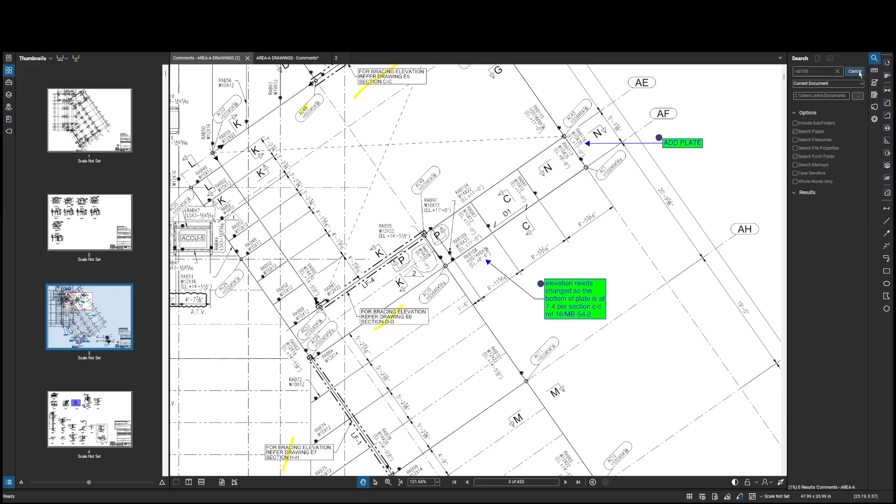So I'm going to get in here and show you a little bit of what was going on. I'll start with this RAB 108 here. We go to that detail... oh, that's not it. You'll see this little plate here.

This plate is supporting a doorway currently. As you can see in this view, it's supporting this brick above the doorway, but there's no plate to support this brick over here. I'm kind of puzzled by it, why you would only support this portion but not this portion.

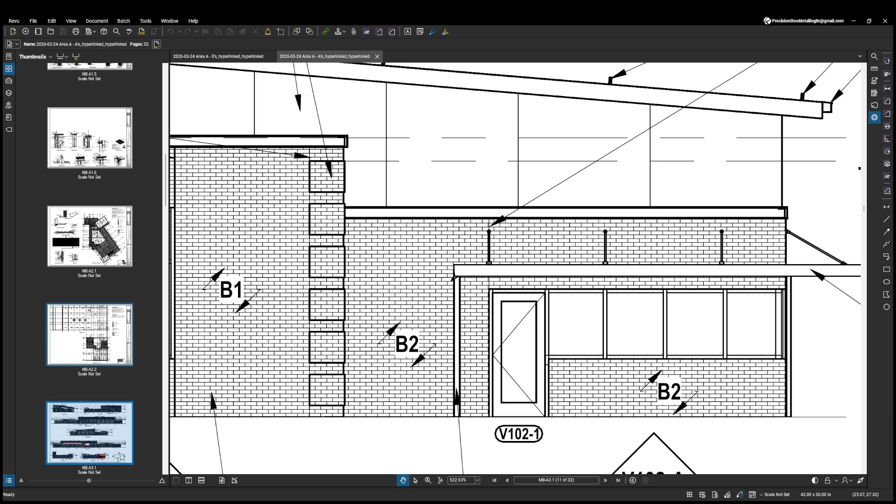There are no lintels. I ended up finding that there were no lintels on the project above any of the openings. And these plates, the plate I'm talking about now, is missing in the locations where it was required on the project as well. So I'm going to go through the architectural views here and show you.

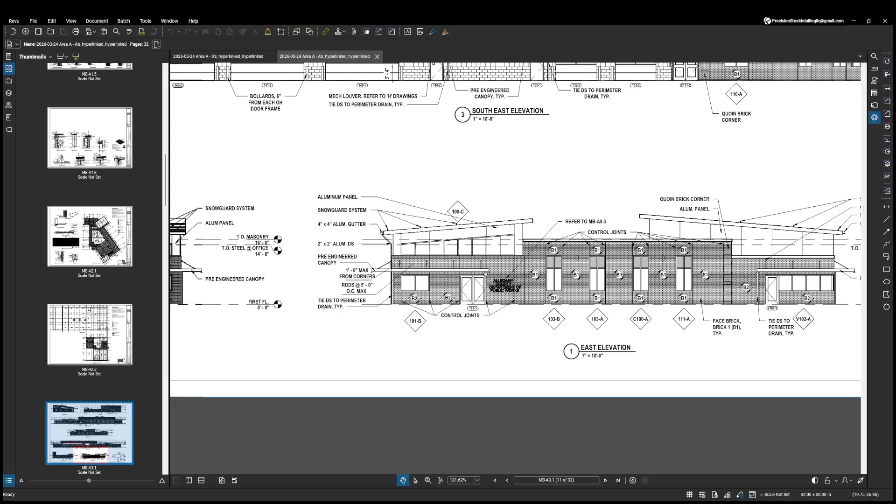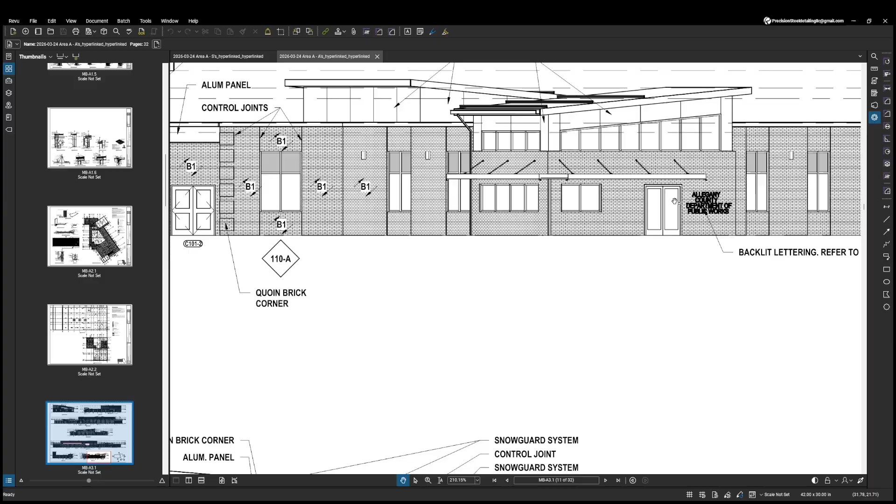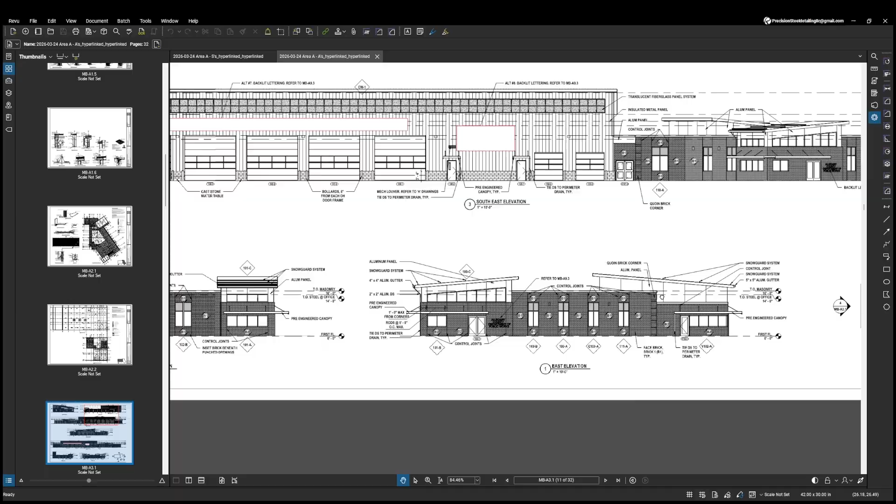All the openings that didn't have support, like at this location, this is all brick, and above all these openings there's no support for the brick. So yeah, none of these openings had any support.

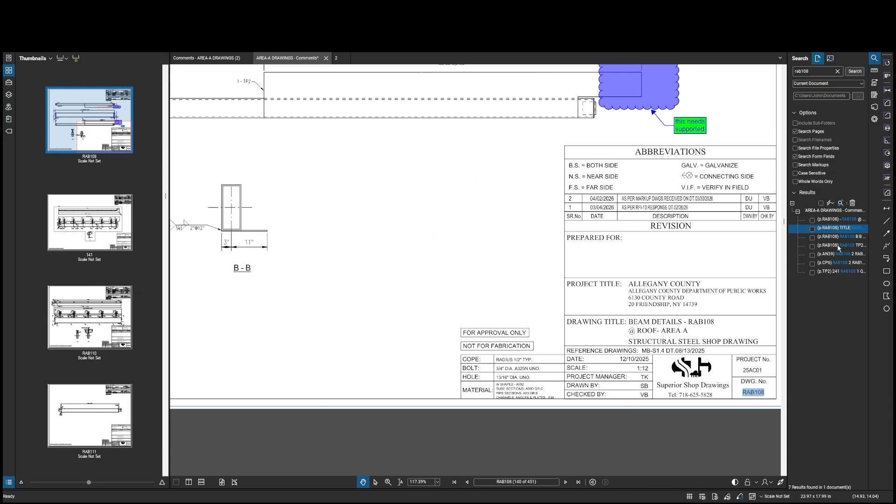So come back over here. I tell them that this plate isn't long enough above the windows. So then go to their drawing here. Now they revised it, extended the plate, but now...

They extended the plate past the column, and I have that drawn here. Like this, these two blue lines roughly represent the column, and you can see that plate's extending out all the way to the corner, but then there's no support.

There's no support on this column, and you can see that there's no support on this beam supporting this plate. So any of this brick that's out here above the window, all that load needs to transfer back into this beam.

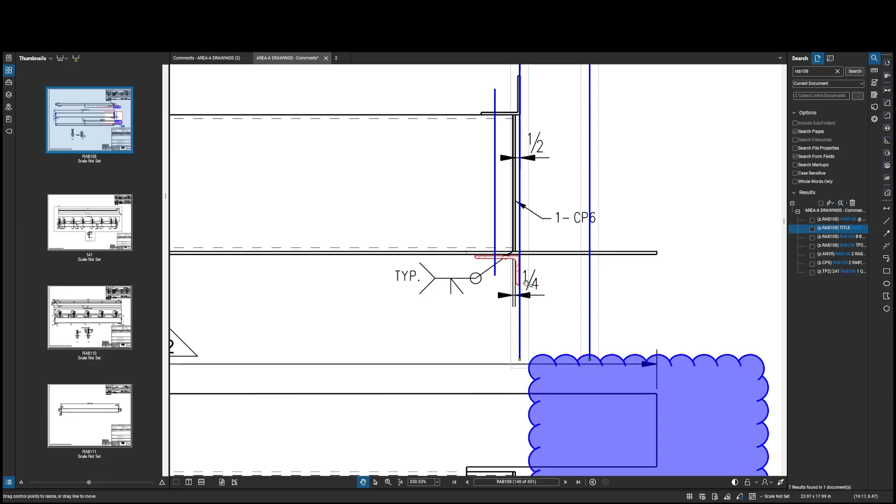And this up here is just a top view. This is like a view of the brick, and you can see that it's probably more like this. But then it wraps, I guess, like that.

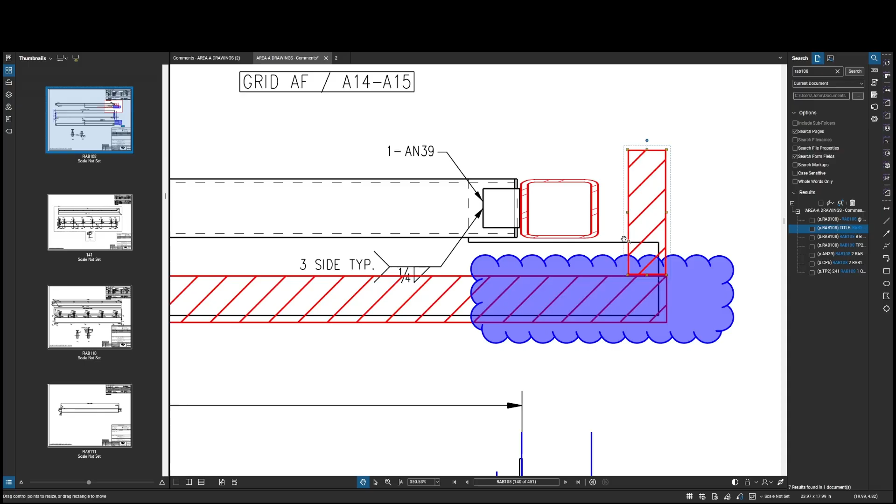And then there's another beam on this side with a similar plate that extends over. So yeah, ultimately that's not ideal. You don't want to cantilever this out without supporting it somehow, and they're just not doing that. They need to do that.

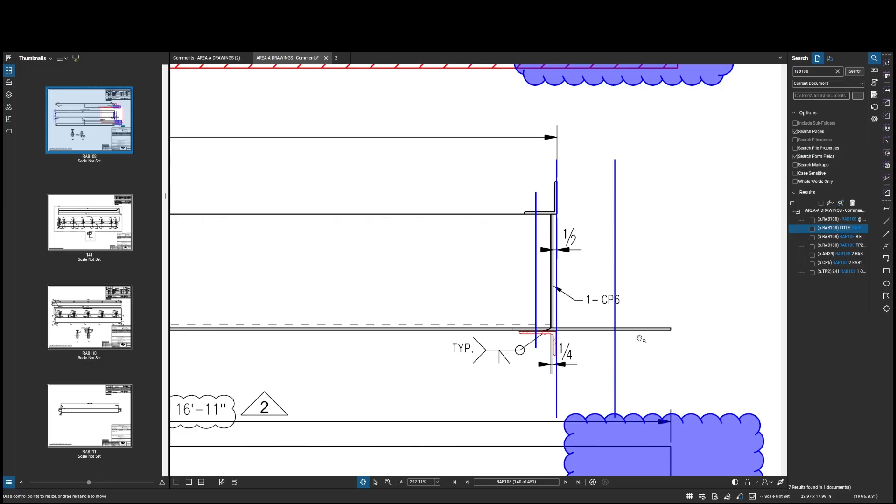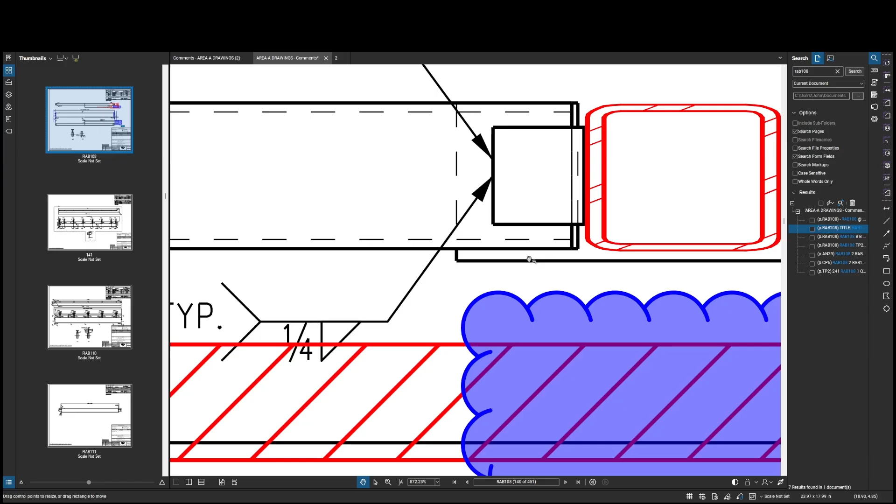Another issue I've seen on this detail, just real quick - this cope that they're putting in there, this should always be radius. This should never be cut at a 90-degree angle like that, just because this becomes like a weak point of this plate.

Any copes need to be radiused, and any detailer should know that when they're doing this type of work. Again, here's another thing - here's an angle. This is what the connection looks like.

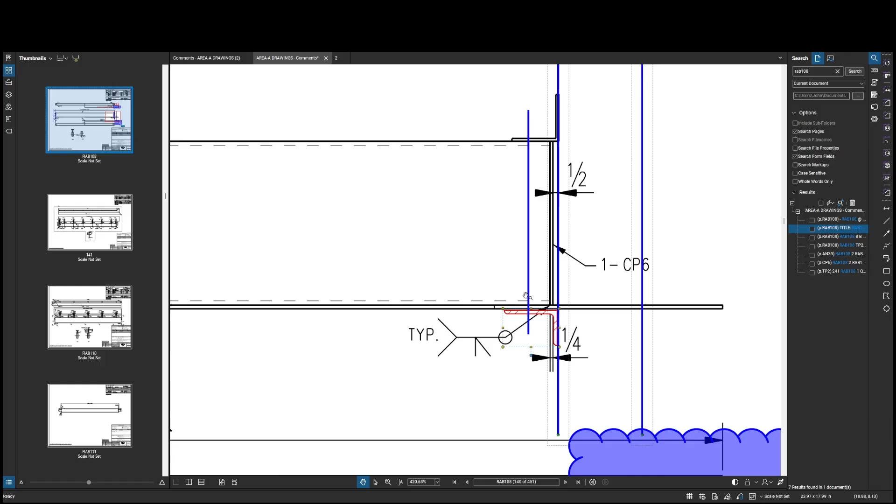Where you're going to have a column and then you're going to have an angle below it, or a seat, some type of seated connection. There's no erection bolt for this. Basically, this detailer is assuming that the erector is going to bring this beam in and sit it on top of this angle.

And just like, I'm sure they have a field weld detail - I'm pretty sure I've seen it, it's been a while since I did this, but I know they have a field weld detail. They just don't have any erection aid, and that's the main point of this - you need an erection aid with this type of connection to make sure it's held in place.

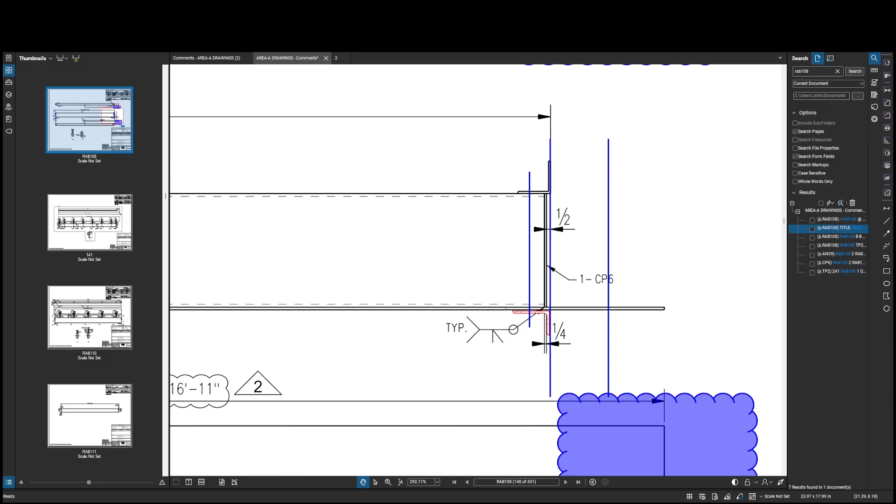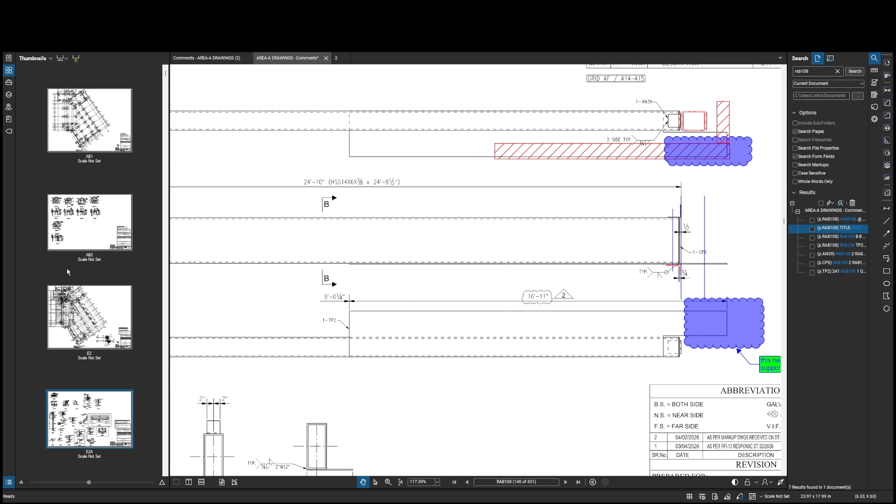So the erection crew can set this down, stuff that bolt in there to secure it in place until it gets field welded, and they can move on to the next piece. This detailer did not do that on this project, and that's an OSHA requirement.

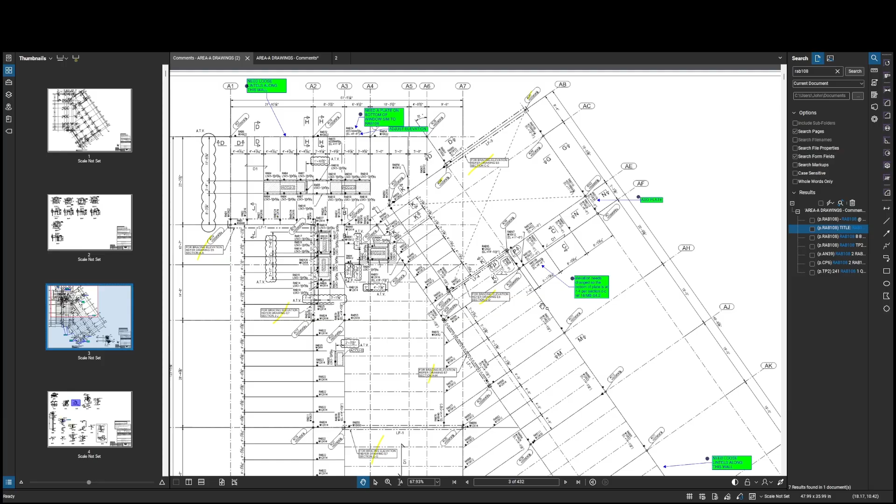So most of these other comments on the plans are all about lintels and these plates. Another thing with these plates is they're not at the right elevation. The detailer just put in the beams at the elevation shown on the structural drawings, but when you lay it out against the architecturals, the beam's not at the correct elevation.

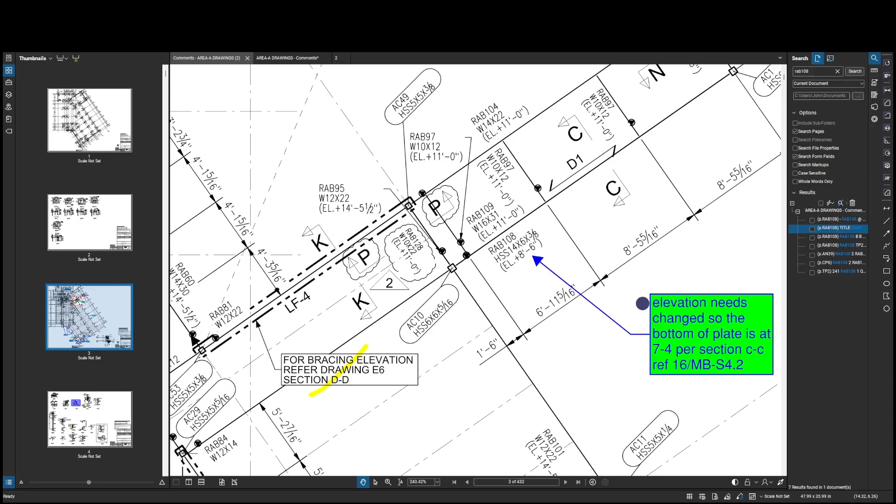They want the plate at the top of the window. Right now, the way this detailer is doing it, it's encroaching into the window. I'll show you that here.

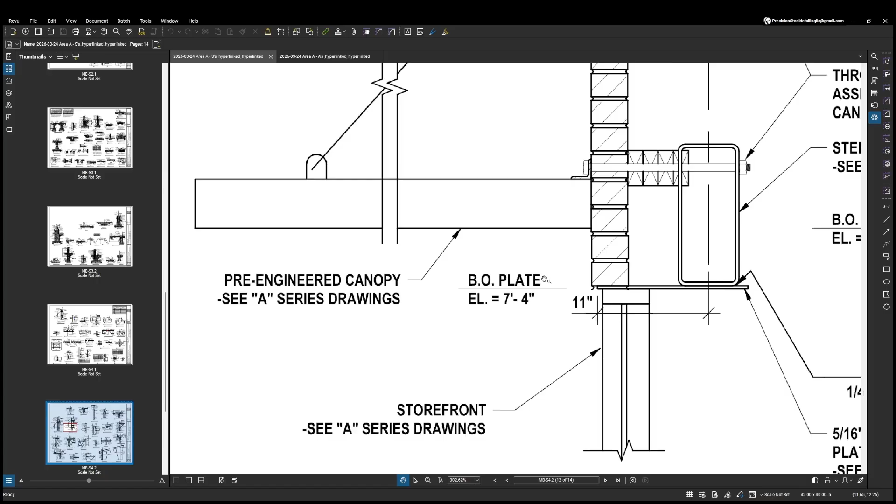One of these section views - actually it's on the structural drawings here. Yeah, so they're showing the bottom of the plate at the top of the window, and that's just not what's happening. This plate, the way the detailer currently has it drawn, is down here, and then this beam is down lower.

This video shouldn't reflect bad on the fabricator, erector, or design team, because as far as I'm concerned, they've got their hands full and they're paying detailers to do this stuff. But detailers just aren't doing what needs to be done on projects a lot of times. I can't speak for all of them, but I know from my past experience at my last job, seeing it on this project, seeing it on other projects - I see it a lot, and I don't understand why.

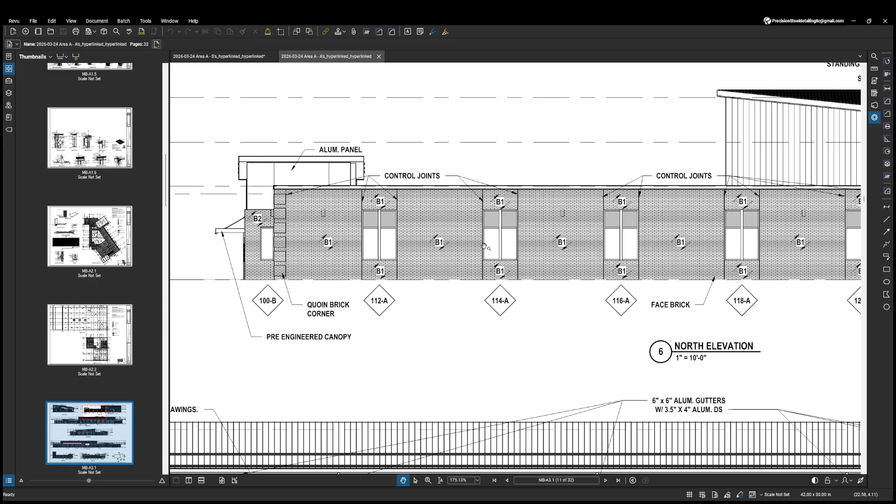Because in reality, if I go back to these - so in reality, what would end up happening is all this steel is going to get erected for this project. Then the mason's going to come in and start doing his thing, erecting all the masonry work. He's going to get to the tops of one of these openings and realize, hey, we don't have any support above any of these doors or windows.

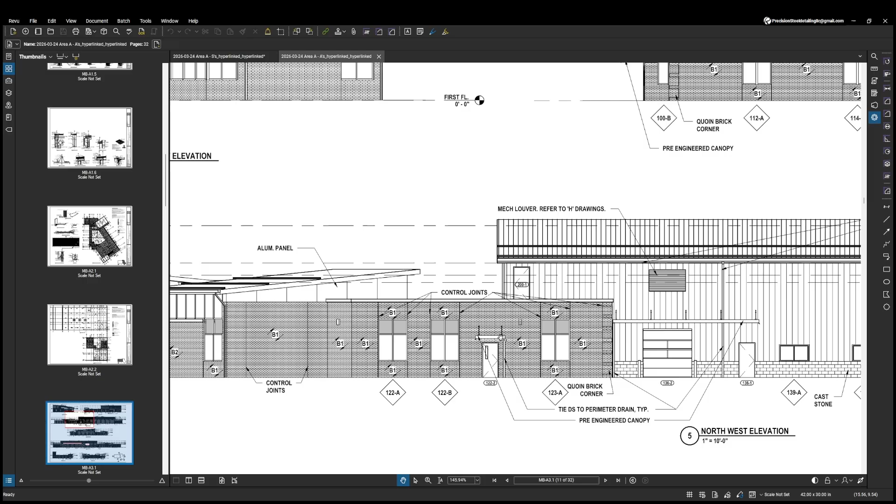Then he's going to contact the GC, and then the GC is going to contact the fabricator, and then the fabricator is going to call the detailer. Then the detailer is going to detail everything, and while that's happening, the fabricator is going to be trying to get material, but he's waiting on the detailer to find out what material he needs. Then the fabricator finally gets erection drawings or fabrication drawings.

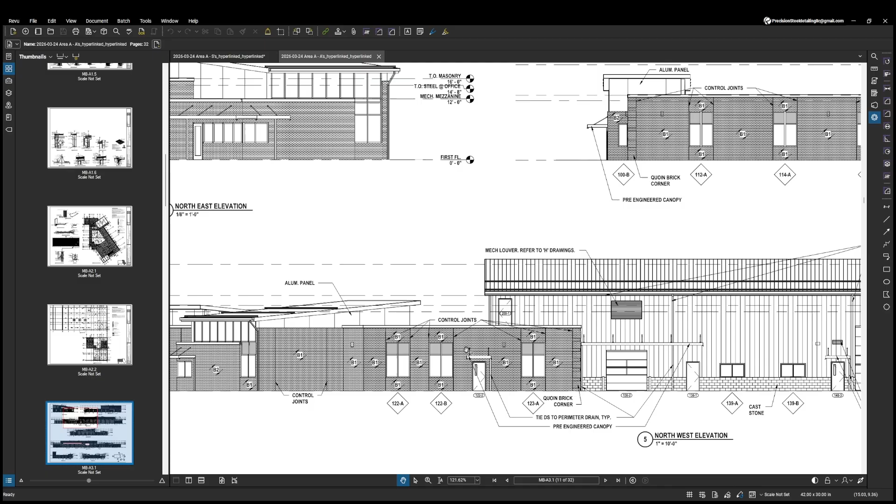He fabricates all this stuff. Then it's got to go to galv, and you got to pay for another truck to go to the field and carry all this stuff. Then, if those plates need to be welded to the beam, somebody's going to have to pay that guy to do it. All meanwhile, the mason's on site waiting to lay this brick down, and they can't.

So just through all that, you've got so much time and money into this schedule just from these errors, and I don't understand it. Like, I see more and more detailing companies taking their work, subbing it out overseas, and then selling it back to fabricators. Like they've got the best deal in the world - they've got the price and time, schedule wise.

But then in reality, when you get down to it and actually do the project, you get errors like this that cost the fabricator money and delay the schedule on the project. So you're not benefiting by using these guys. I don't understand what you're doing, but yeah, that is not ideal in my opinion.

I don't know, I would lose sleep if I missed stuff like this, but I don't, because I look at every project. I'm looking at the structurals, I'm looking at the architecturals. I'm thinking about erection - I'm thinking about so much more than just what's shown on the plans.

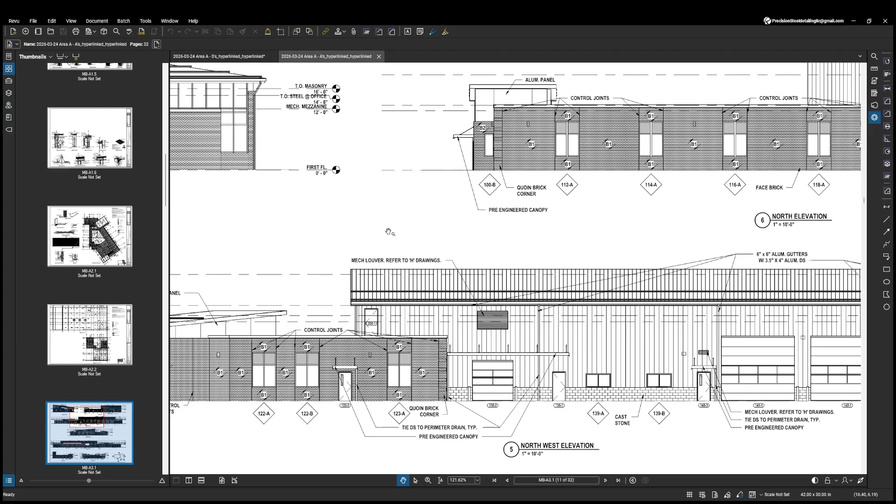From my standpoint, I'm looking at what's on the drawings, and if I get awarded the project, I'm looking at how it's going to be erected. Just coordinating everything, making sure it all goes as smooth as possible from erection to fabrication, from every aspect. I'm thinking about the other trades, mechanical, masonry, the other contractors, order of erection, sequencing. There's so much into it, and that's why I titled this video 'There's levels to this stuff.'

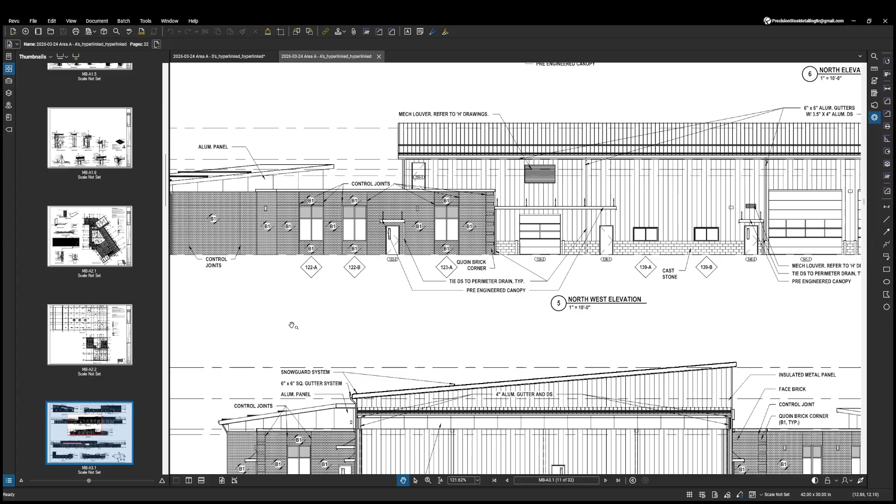There's a lot of detailers out there, but they're not all the same. A lot of them aren't doing the same work that I do, or I know there's some others out there who do. I'm sure, but I haven't met a lot of them.

Just to give you a little background, I worked with a lot of guys who learned from guys at American Bridge. American Bridge was like the first to do it, drawing everything on paper, hand sketching everything out. They'd hand their drawings off to their female coworkers back then, and the females would rewrite everything because they had cleaner handwriting. These guys were using slide rules and doing everything by hand, and the drafting rooms were huge.

Then these guys took their information from American Bridge and handed it off to the younger generation. That generation grew up doing a similar thing, but got into computer-aided drafting, and ultimately handed it off to the next generation. That's kind of where I fall into this. I like to think I learned from the best - these guys were really good - so I'm just sharing some of that knowledge back with you guys.

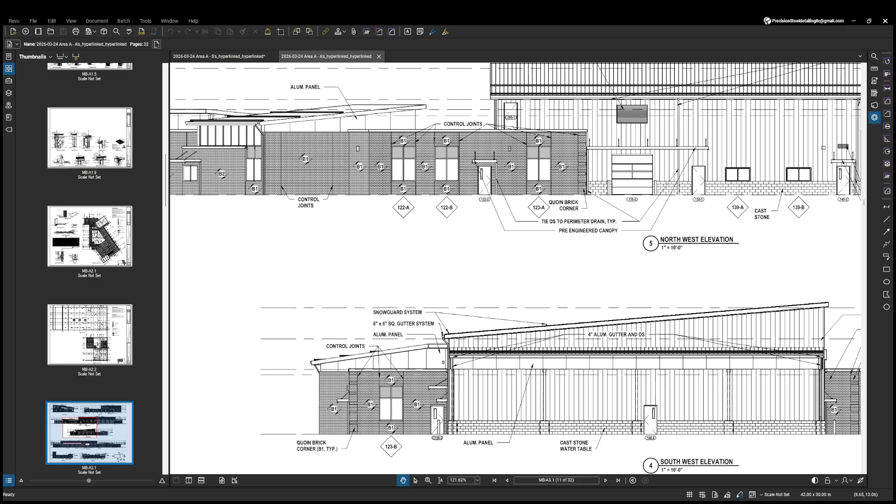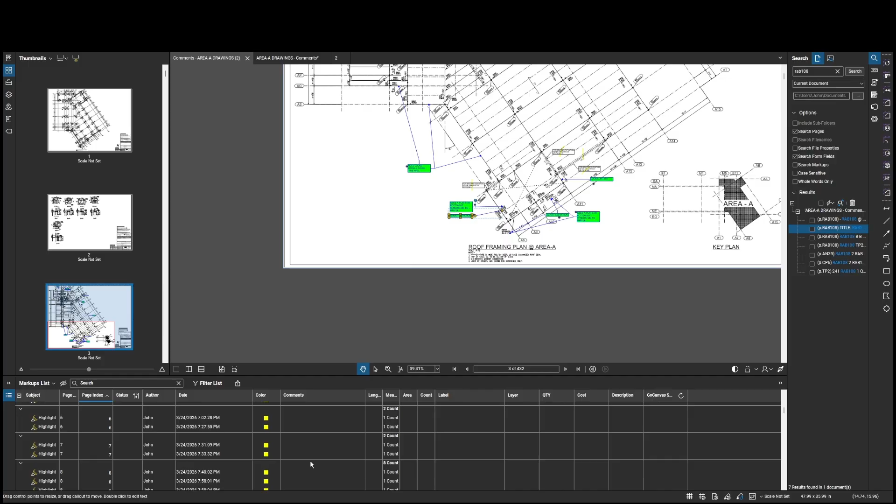Bear with me. So we covered there's no lintel, no brick support on this project. That was provided by the detailer up to this point, and in some cases what was provided isn't supported, so it's not good.

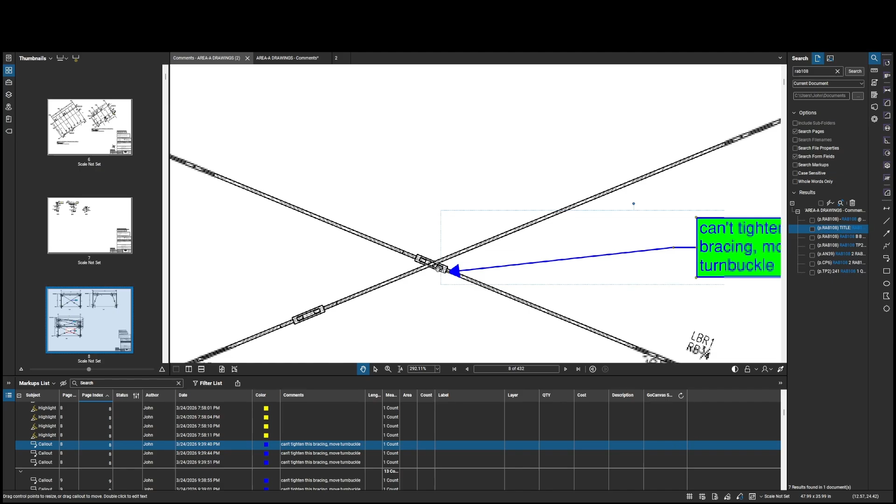Here's another issue I've seen where you've got rod bracing, a clevis and turnbuckle. These turnbuckles are all located right here in the center, which makes it a real pain for the erector to tighten down with this other rod being there. You could probably turn the turnbuckle, but it's going to be a real pain in the ass, and it's like that on every single brace bay on this project, and there's quite a few of them.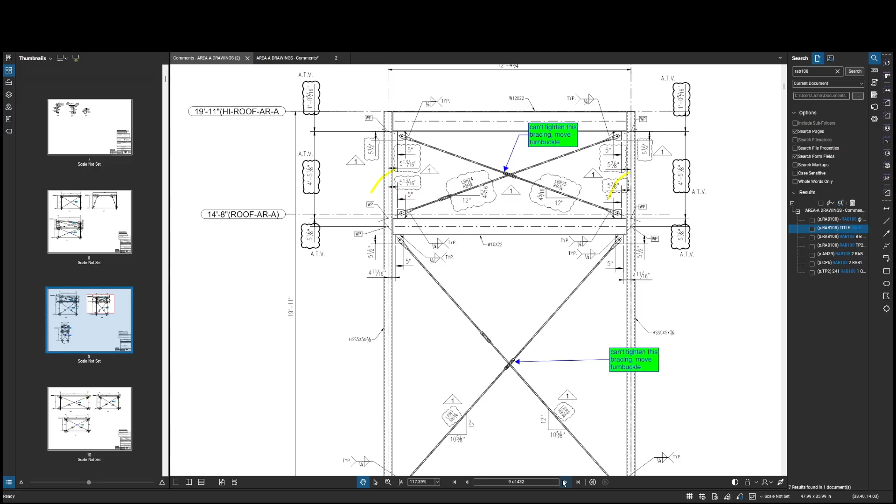I'll flip through here showing you all these different brace bays where it's not ideal. And then also just briefly, another thing.

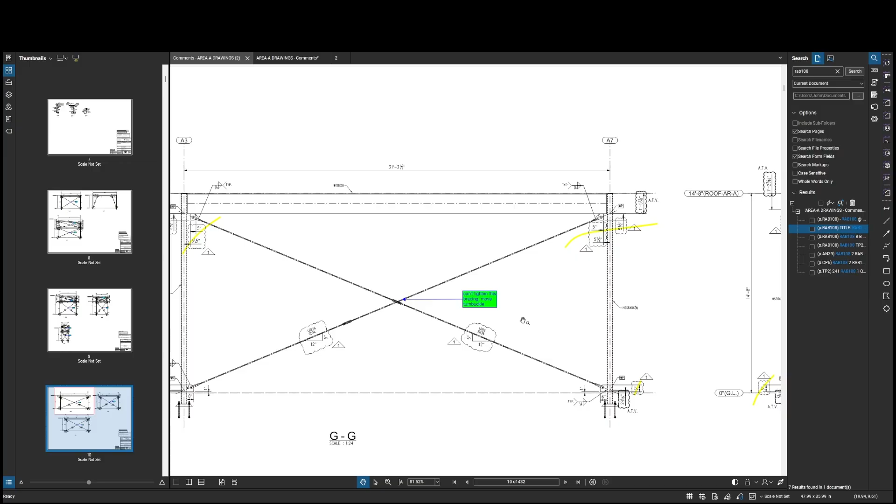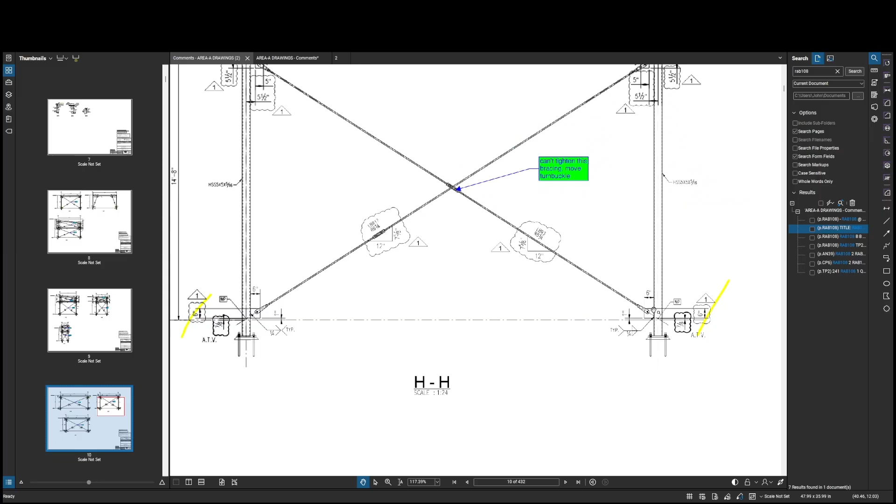None of these connections are designed - well, they're designed in that the design team designed them, but the software these guys are using, Tekla, a lot of these overseas companies use Tekla and it's just not good. In a lot of cases they're just putting in material and calling it good. It does have capabilities to do connection design, there's ways to do it, but a lot of these overseas companies don't, and they're just kind of flying by the seat of their pants. Not ideal.

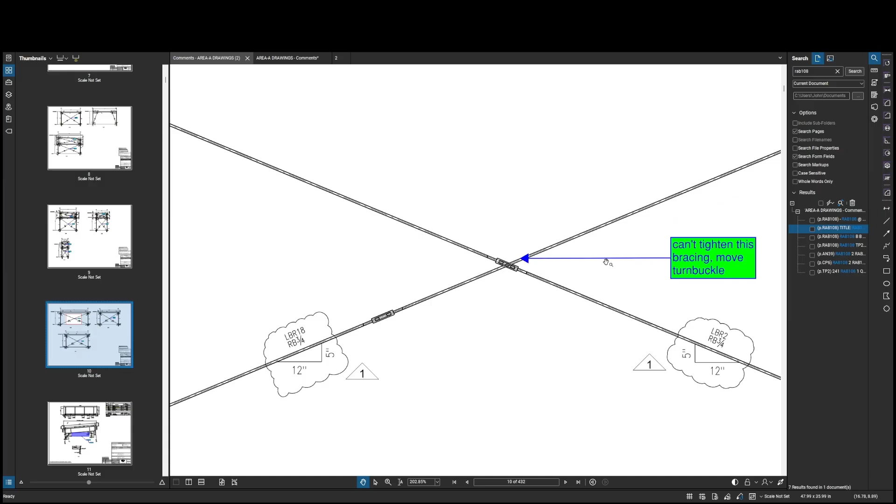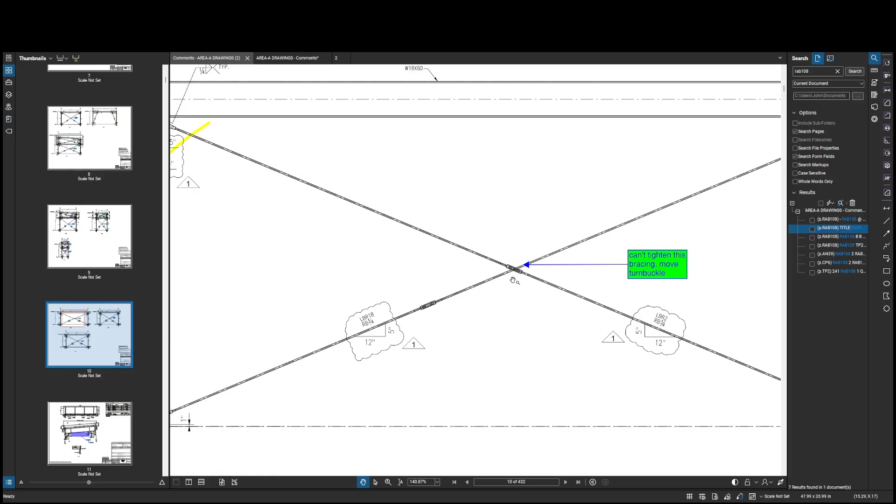Ultimately, you can't tighten these properly. You could put one in, tighten it down, and then add the other brace and tighten it down. But in my world, doing things properly means you don't want the erector to have to do anything in any particular order unless you absolutely have to. You want to let him do his thing and it should all work out. You don't want to tie his hands too much, making him do certain stuff in certain orders. Everything should just go together, and everything should be smooth.

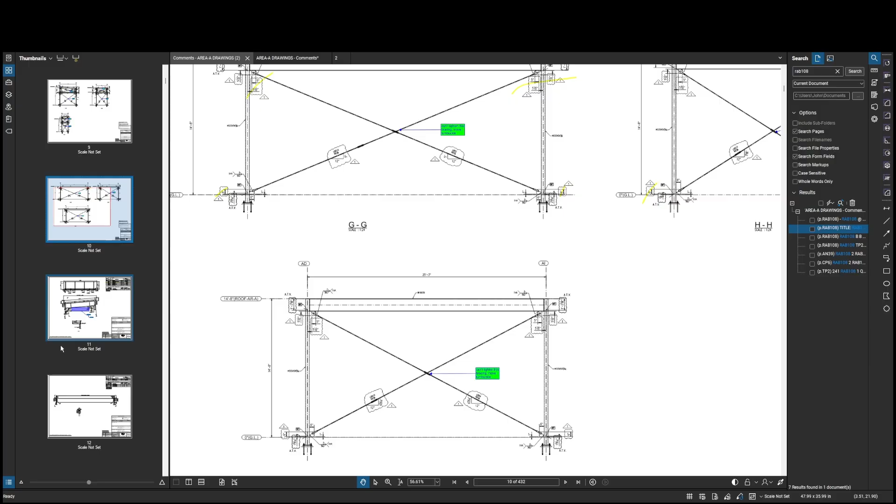Here was just a general note. I think there's additional steel that needs to be provided on the bottom side of this beam to support more brick that's on top of the roof. That's currently just going to rest on top of the deck. I don't know if that's what the customer wants or what the design team's intent was. I think it's supposed to be something more like this detail here.

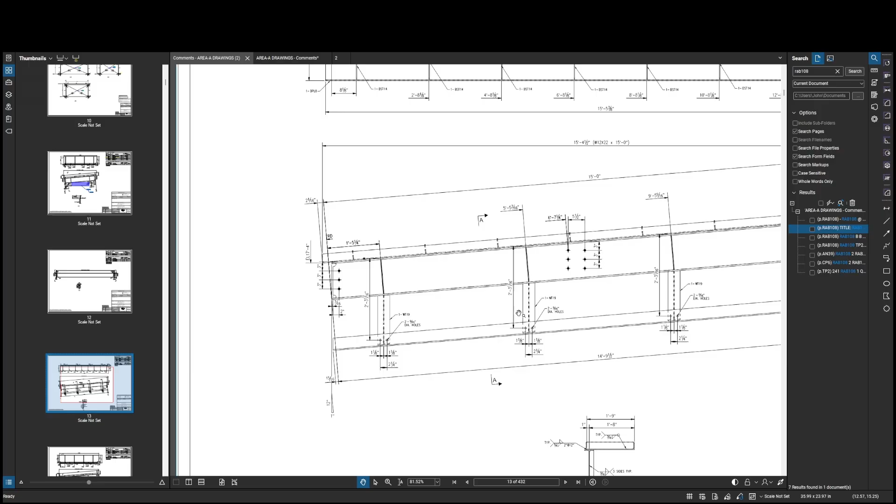That's why I was questioning if it was required, because it's not really clear on the designs. That's something the detailer should have asked and should get cleared up, but they haven't done that up to this point, and this is now the second set of approvals. They should have done that on the first set, in my opinion.

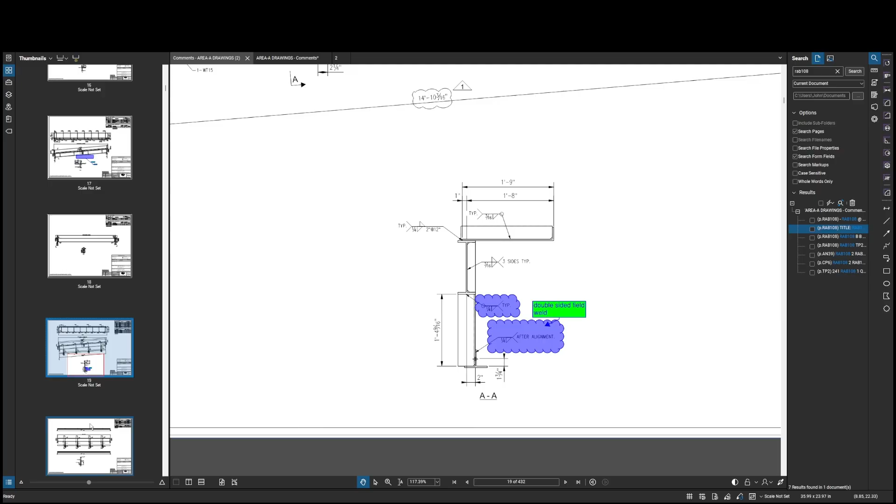Here, just a bad weld. It's never good to have bad weld signs, because the guy on the shop floor is not going to know to ask that question. He's looking to you saying, okay, that's good. So he doesn't have anything to compare it to. He doesn't have the designs. He doesn't know. So you want to make sure you're providing all the right information.

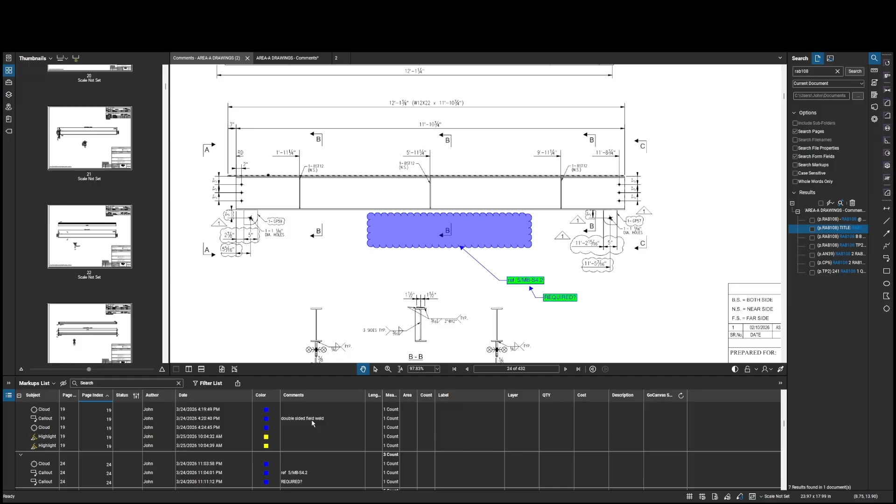Same here, that's another note to check to see if more additional steel is required. Here's that double-sided field weld we just talked about. I'm just looking for more comments. Here's one.

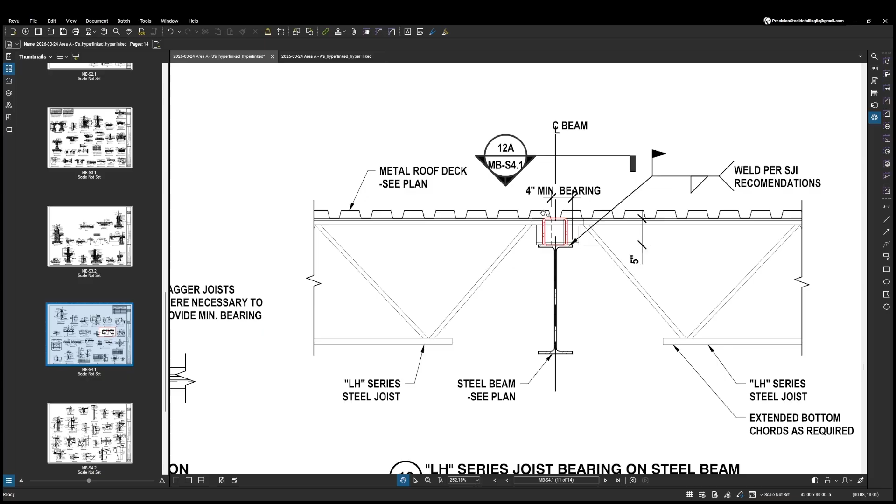So flipping through another screen, I'm going to show you the condition here. So here's the condition of what I'm about to show you next, where we have a beam and then we have a tube on top of that beam. And these joists need to bear on the beam.

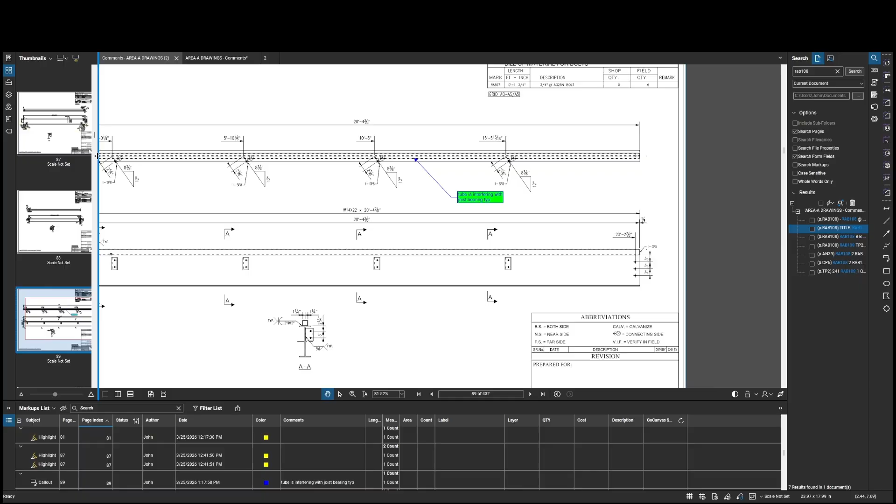So if I flip back over to that detail here, you can see that there's no room for these joists to bear. They just didn't account for them at all. They didn't account for any of the joists.

So either the erector is going to set the steel and at some point realize it's too high, or they're going to set it knowing it's too high and then have to cut all these tubes, notch all the tubes at every location where every joist sits. Regardless, there's not a good answer to the fix for this.

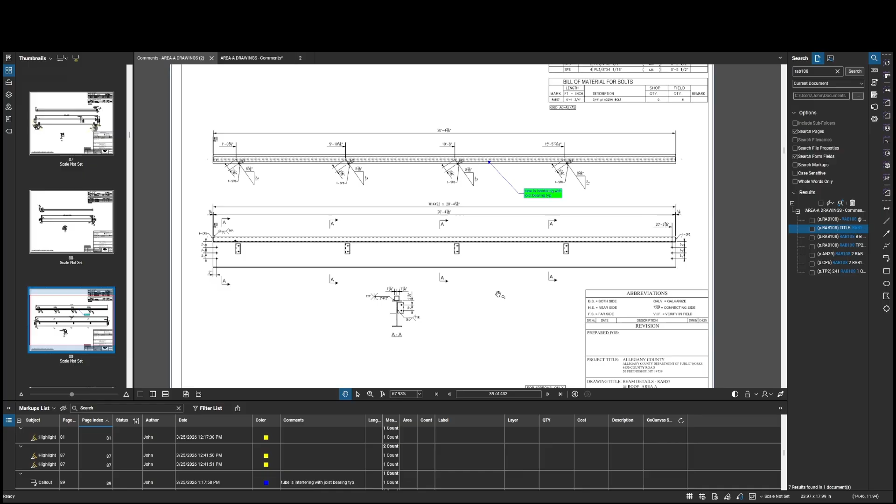And again, I don't understand how you're detailing and you're not aware of this stuff. This is just stuff that I noticed randomly.

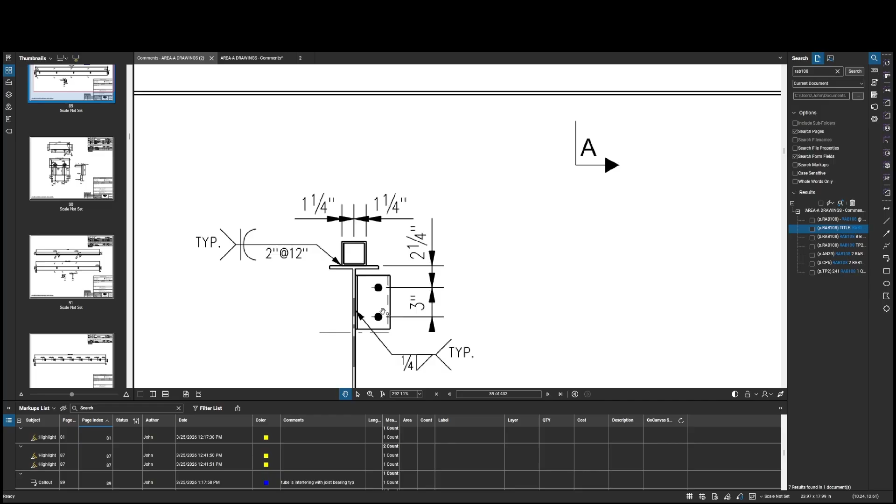These kind of, I don't know, I'm not going to get into that. But I'll show you real quick what that detail looks like here in another view, on the updated set of drawings.

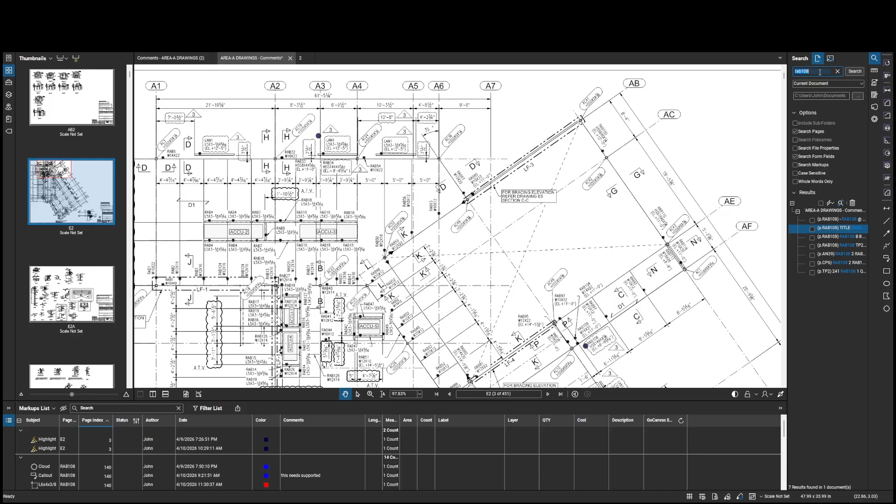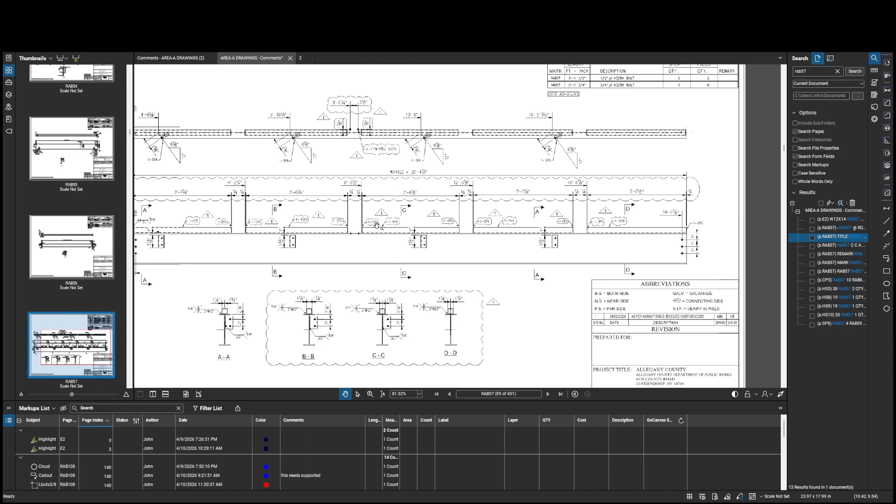So this is that same detail with that tube, but you can see how it's notched now to give room for the joist to attach. You can see how much different it is now versus what was required, and this is the work they would have to do in the field. And this isn't the only beam like this, there's several of these beams that had that issue.

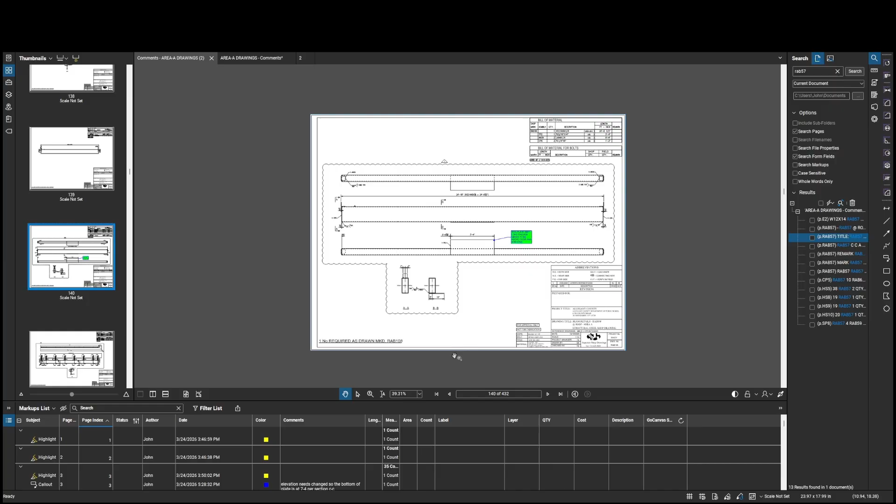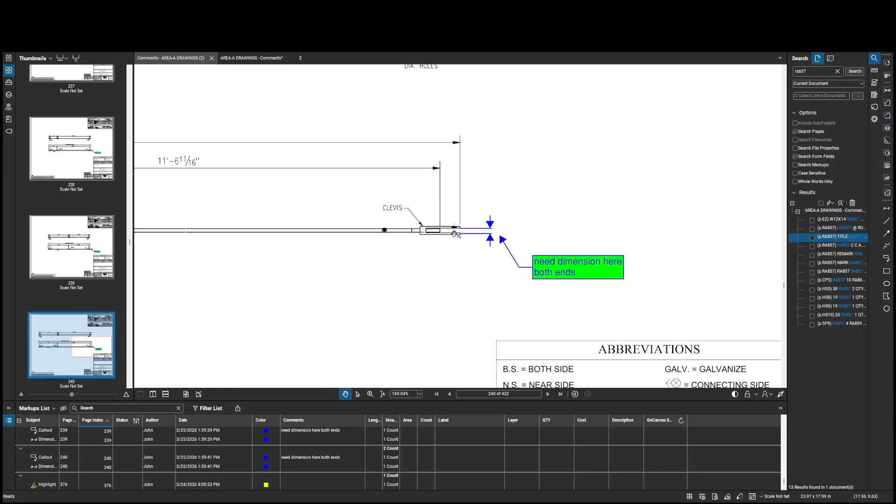So let's go to the, then here. This is the end of the clevises. They're not telling them how wide to make this grip here on their detail drawings. That's just information that needs to be known, and that's like that on every detail.

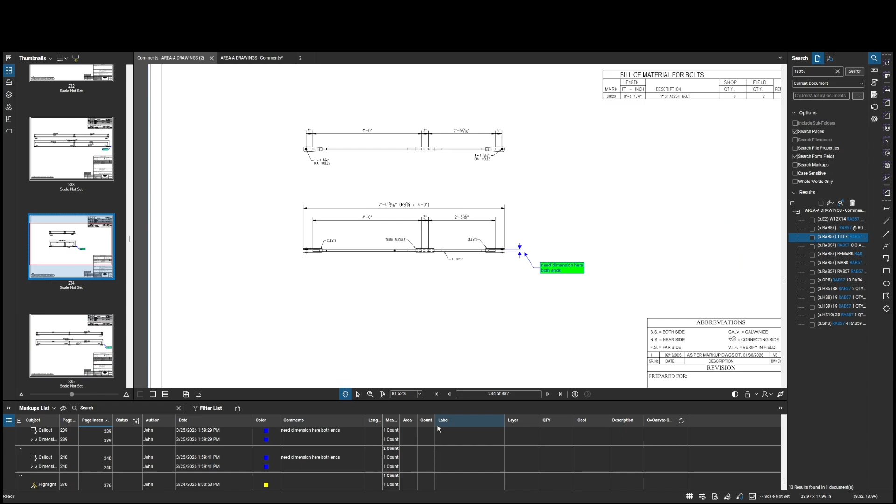And there's some where, I don't know, the clevis is just not right at all. I was looking for one of those, like this guy here. I don't know what that is, but that's not right.

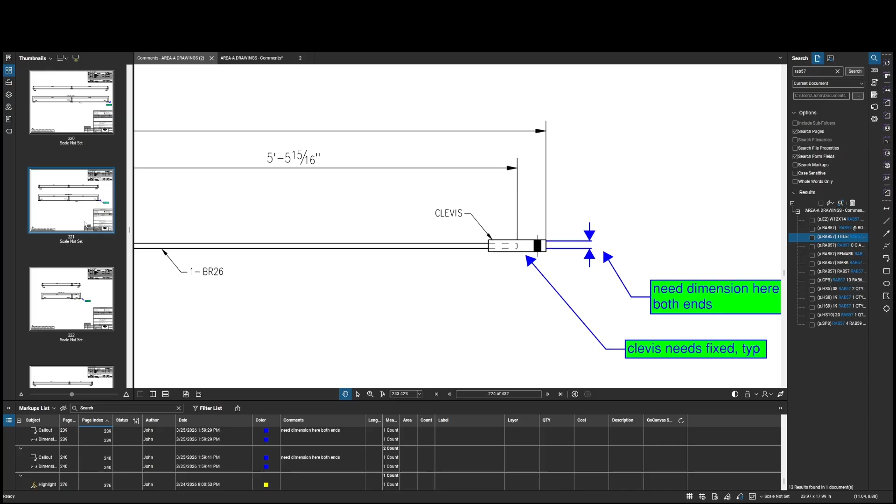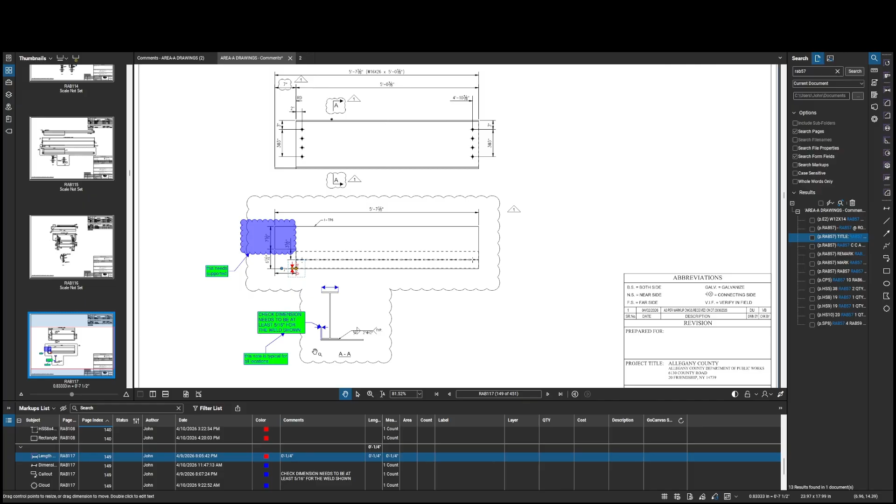So there's another, you know what, what was it, there's one other thing on here. So here's this guy, here's another one of the plates we're adding on the bottoms of the beams. This is on the updated set where they added the beams in, or added the plates in.

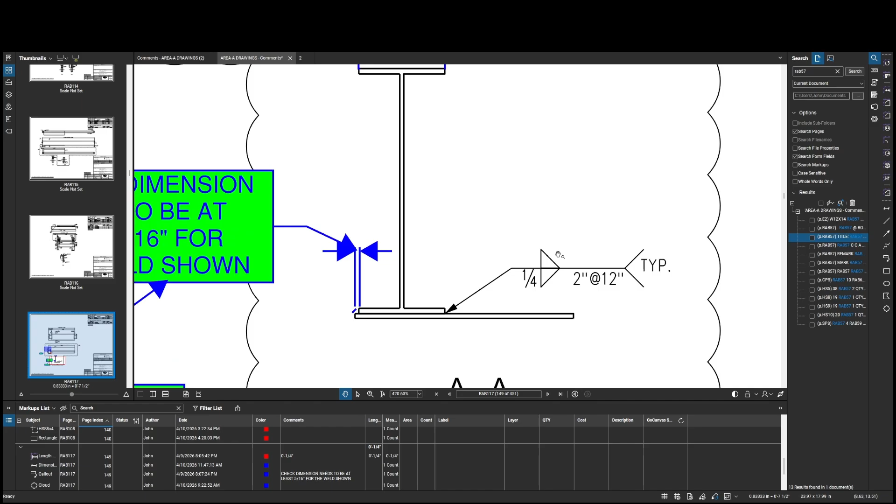They have this quarter inch fillet weld here. Not an issue, but this gap's only a quarter inch currently here, and you need at least an extra. You need an extra 1/16 inch on a weld that size, just to allow the shop enough room to lay the weld.

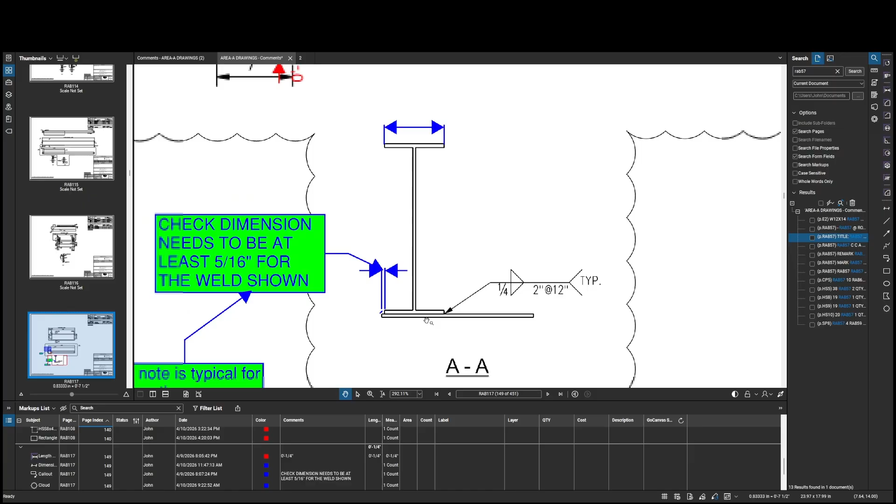And then another thing, whenever you're doing pieces like this, anytime these pieces get rolled, these flanges are always wider than, I'd say more often than not they're going to be wider than what's shown in the AISC manual. The AISC manual has a flange section, but they're not always that, because when these things get rolled, the extra material comes out here in the flanges.

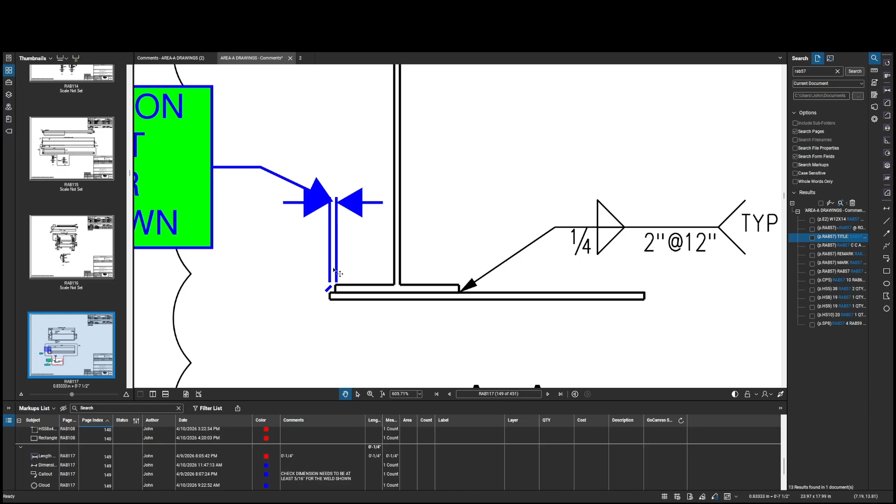So these flange widths grow and vary, and that's why you never dimension off them like I'm showing there. You don't do that. At the same time, there needs to be at least an extra 16th of an inch here, and I would say even more than that based on the fabrication tolerances of the wide flanges themselves.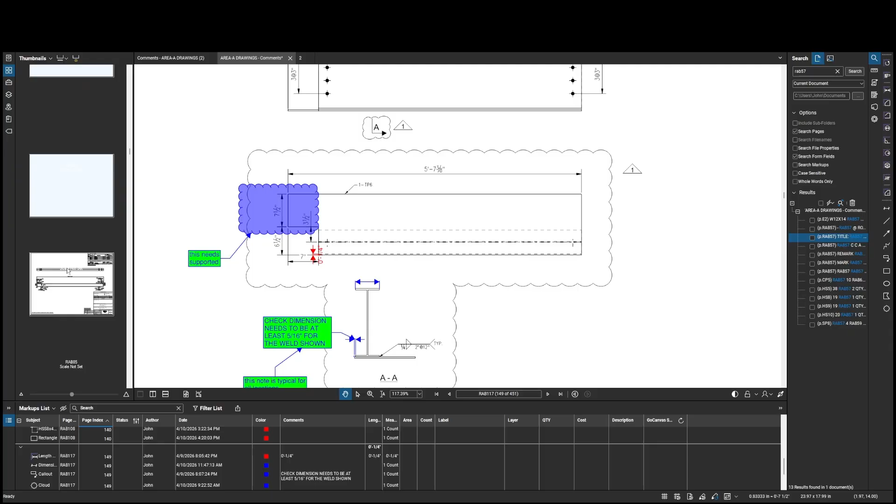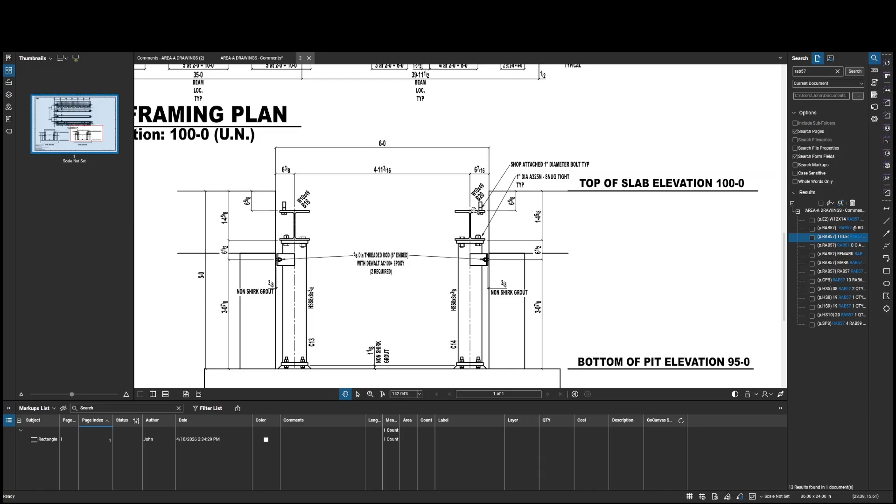So that's what I found on this project from another detailer. Just as another note, I'm not sure if I covered this previously, but this is a different project that I did, and I'll show you something that I noticed on a project when I was going through.

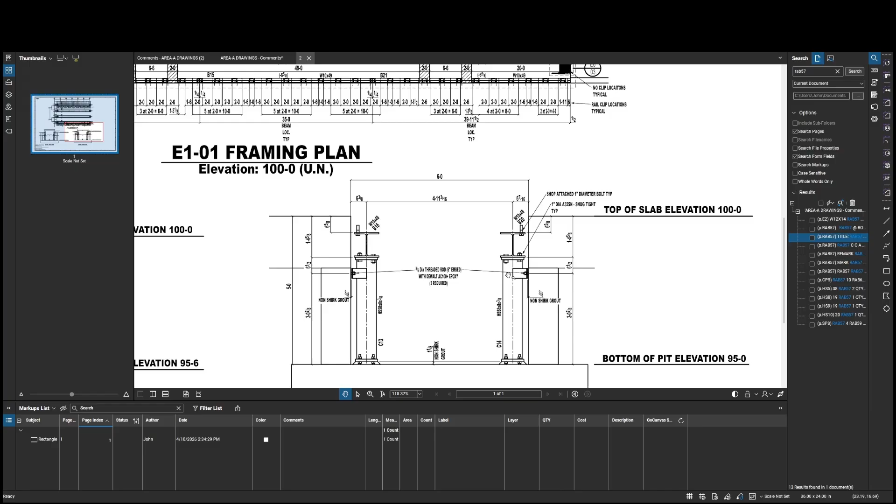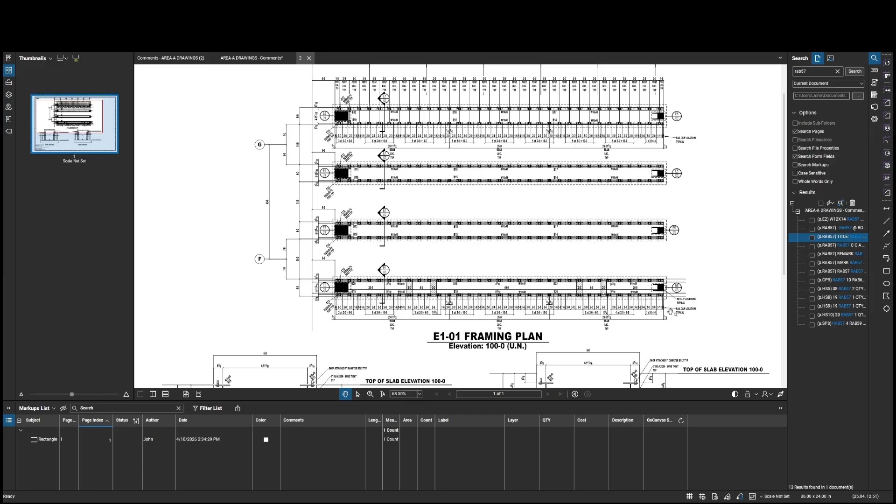On this project, these posts were down in a little pit area. You've got these posts down here, and then you've got the beams sitting on top of the posts, and there's quite a few of them - there's a lot, like 200 and some posts. I want to say it's like 250 or something like that of these posts, and they're all sitting down in this pit.

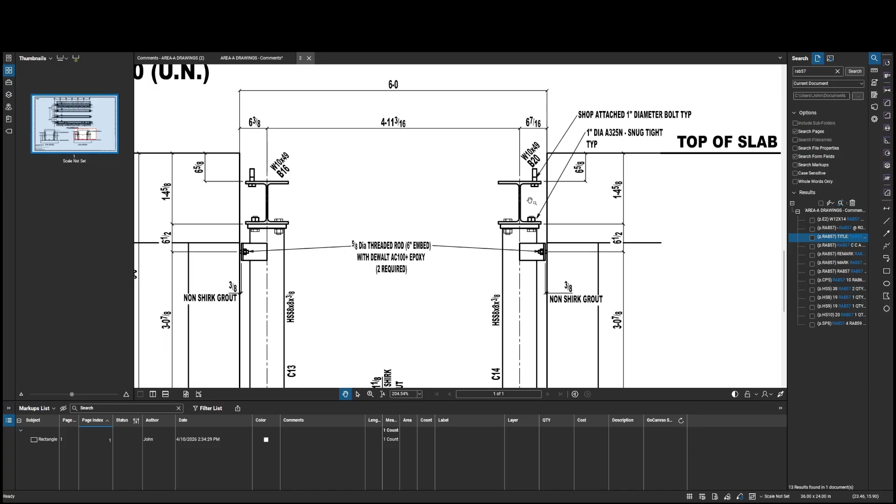This wasn't noted on the design drawings or anything. But when I was going through modeling this stuff and detailing it, I was thinking about it, and I realized this bolt up here and this bolt down here - there's no access to them once they're down in this pit and this beam's erected. The erector is going to get all these columns in and then go to sit these beams on there, and then they're just not going to be able to put this bolt in and tighten it down.

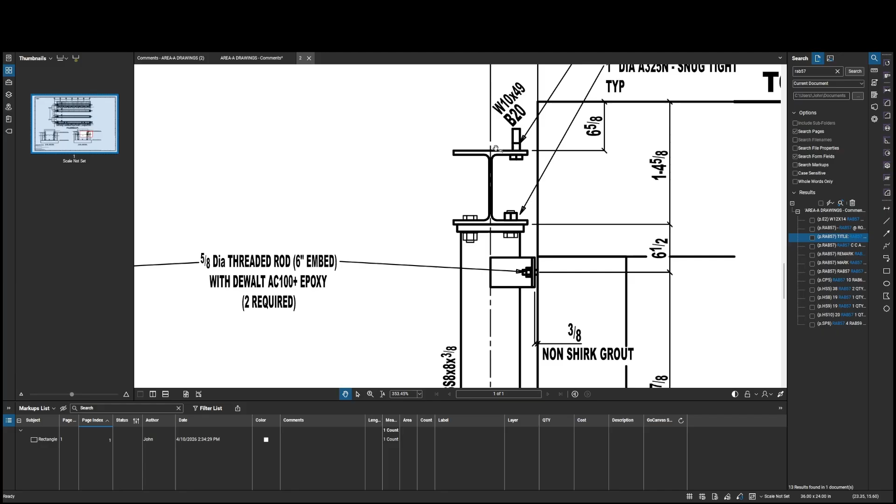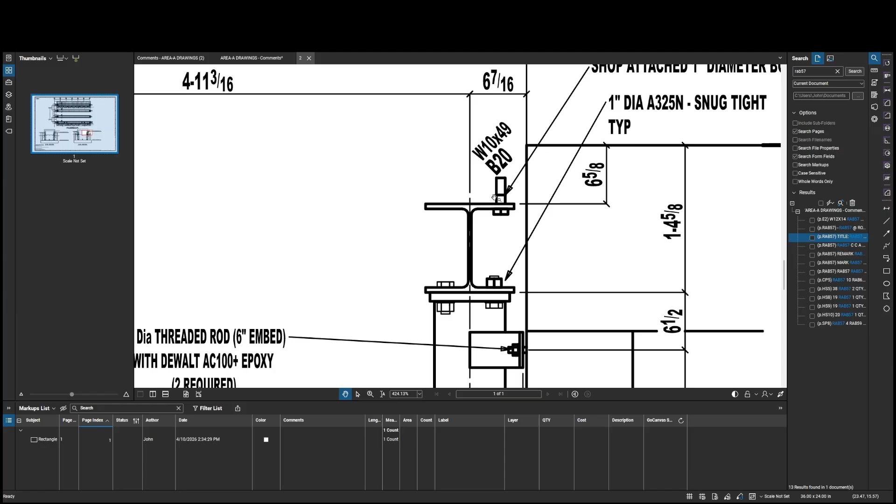So I went ahead and shop attached these bolts to the beam, up here and down below. This bolt wasn't even in our scope of work, but since there wasn't access to it, we picked it up in our scope of work so we could shop attach it before it went to the field, just to make erection easier.

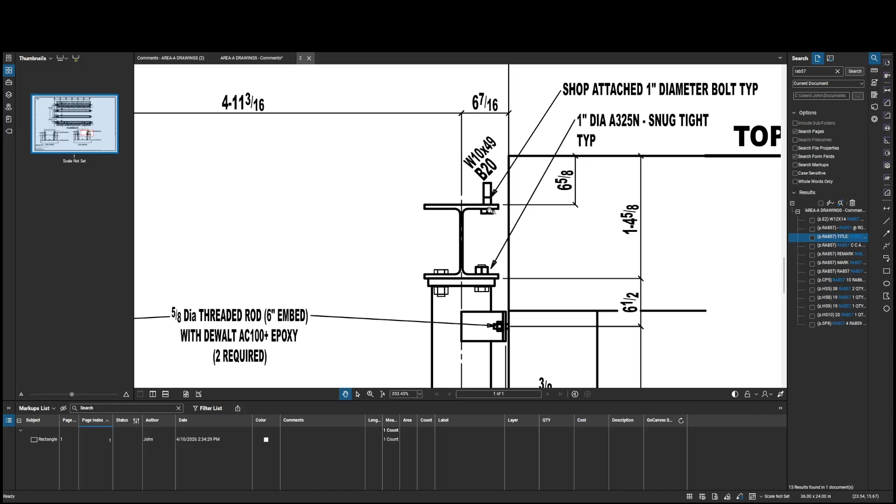I was pretty happy with this because I found this erection issue that could have been a real issue if it got to the field like that, with the erector sitting out there locating all these nuts and bolts and shop attaching them to the beam when they're thinking they're only doing erection.

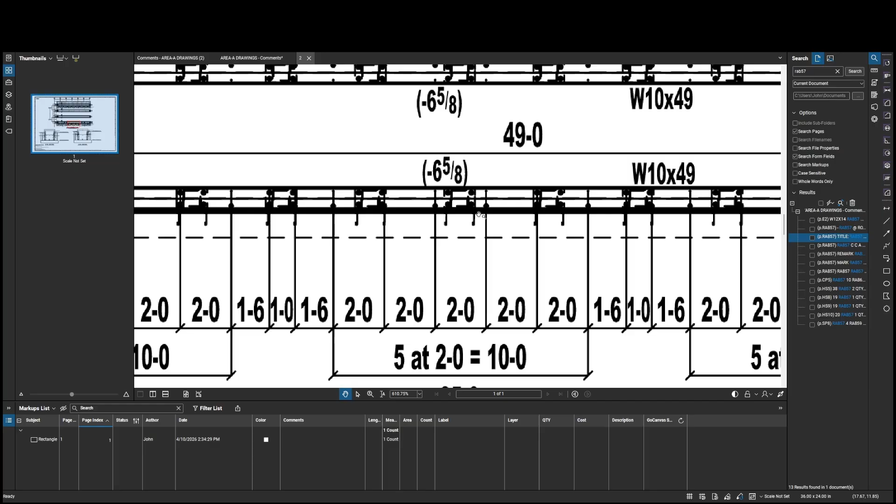There's a cost involved with all that - you can see all these holes here, these are all those bolts. There was like 1,000 bolts that they shop attached, and like 500 of the nuts on the inside - like 500 of these and 1,000 of these - and that would have been a nightmare for the erector, with cost associated with that. But I noticed it beforehand, we addressed it, got them accounted for, and then we ended up putting them on in the shop.

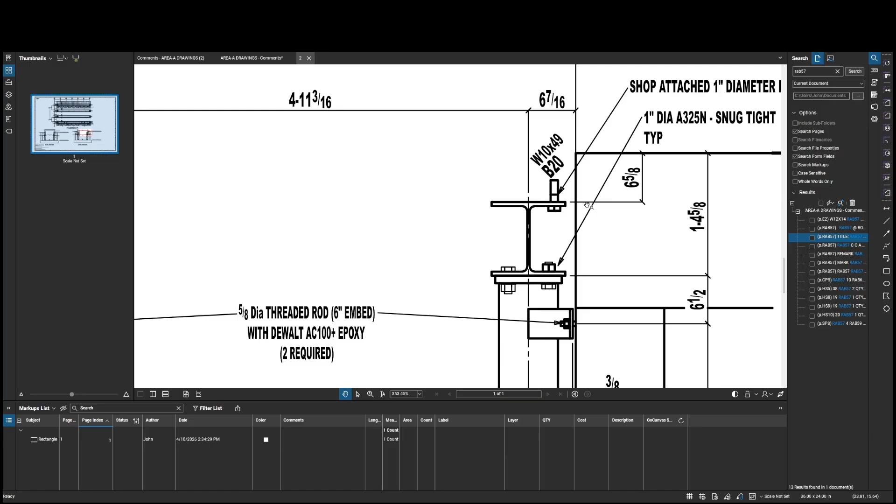So that's something I'm really happy about, and I wanted to share that with you as well. That's pretty much all I got. Sometimes fabricators don't think about it, but there's more that goes into this than just price and timeline.

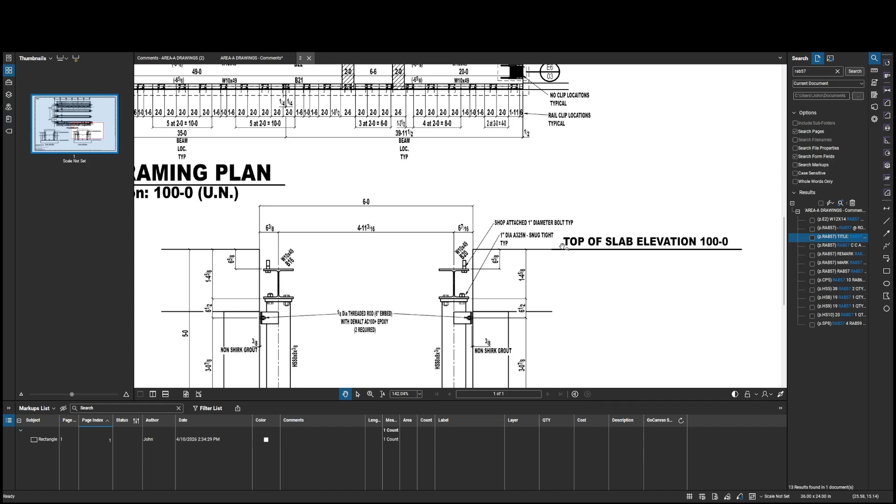To actually get something done like this saved so much time. Imagine if something like this didn't get noticed, like those lintels and stuff, and they make it to the site like that. Maybe the fabricator has time to fabricate this stuff, and he holds off, fabricates it, and gets it to the site on time. Then they go to erect it and they can't - the erector can't - and then they've got to weld all these nuts and bolts on before they even do the erection process. You can just imagine how much time and money you're adding to the project.

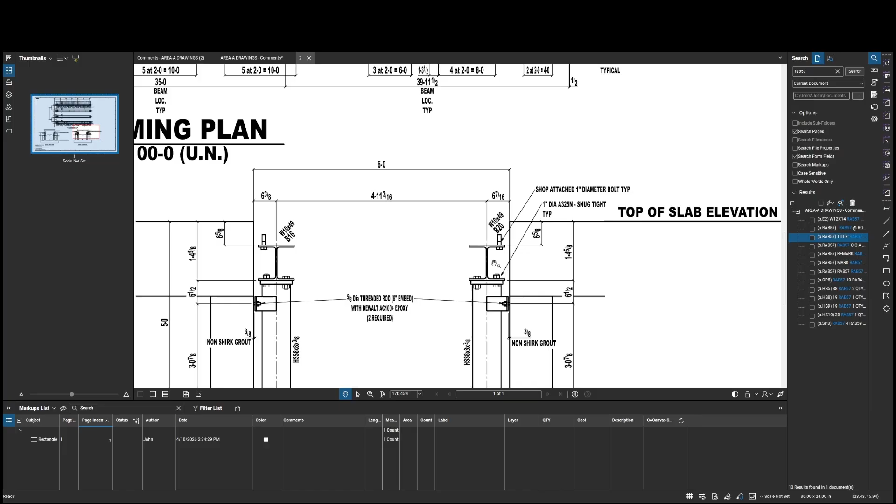There's benefits to getting detailers with experience, guys that are actually putting time into it and thinking about what they're doing, because it could really save you in the long run.